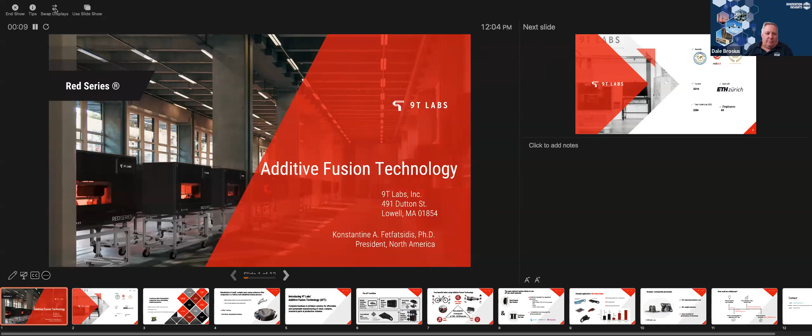And let me get my presentation here going. Everybody see the screen, or do I need to swap display? Yeah, you need to do the swap again. Swap here. Is that good? Yes, perfect. All right, perfect. All right, thank you, everybody.

Good morning, good afternoon, depending on where you are all around the world. As Dale said, my name is Konstantine Fetfatsidis. Very, very nicely done there, Dale. I know it's not an easy name. So, 9T Labs, a company that actually spun out of ETH Zurich now 5 years ago. And just last year, the first year of some revenue generation, we decided that this year we're going to expand into the North American market. I came on board in early October, and we've set up our operations out of Lowell, Massachusetts right now. And our fundamental product, or service, combination—I'll explain a little bit more about that—is called Additive Fusion Technology.

So I'll go through some of the history here on 9T Labs. Like I said, spin out of ETH Zurich. We did a Series A last year, so in total about 22 million in funding. We now have 65 employees, majority of those, of course, out in Zurich. So we're growing and looking to expand, in particular, our North American operations.

Continuous fiber thermoplastic composites, many of us know, have outstanding material properties—nothing new, been around for decades. They enable things like higher production volumes, lower cycle times. The part costs can be significantly lower, even though a lot of people tend to focus on raw material costs. It's important to look at the full process and consider part costs. And then, of course, as we get more and more concerned about sustainability and recyclability and greener processes and products, thermoplastics really can address a lot of that as well.

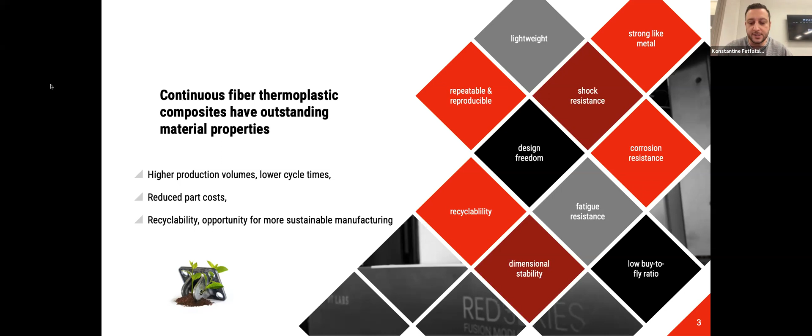However, manufacturing these small, complex structural parts using continuous fiber composites has really been tedious, suboptimal, and a manual process, which drives part costs up. If you consider dollars per pound on a part basis, costs tend to be much higher and more complex when you factor in all the manual labor for layup, the tooling, and all the post-processing required. Many times the manufacturers will just resort to metallic parts instead—aluminum, steel, titanium—in a lot of these structural applications.

Metal remains easier to process, even to simulate in FEA, and as I mentioned, expense has been the big problem. So what's lacking is a full stack, complete solution that takes hardware and software and provides an automated way to make these smaller, complex parts, like the geometry you're seeing on the right, in a cost competitive way—something that can truly replace metals. We know we can replace metals from a lightweighting standpoint and cut a lot of waste, but can it be done so cost competitively? That's always been the challenge.

We think at 9T Labs that we can address this with our additive fusion technology. We call it AFT, not to be confused with AFP, of course. It's really a complete hardware-software solution for affordable and sustainable manufacturing of small, complex structural parts at production volumes. A lot of people, when 9T Labs started off, think of it as starting really in a 3D printing type of technology.

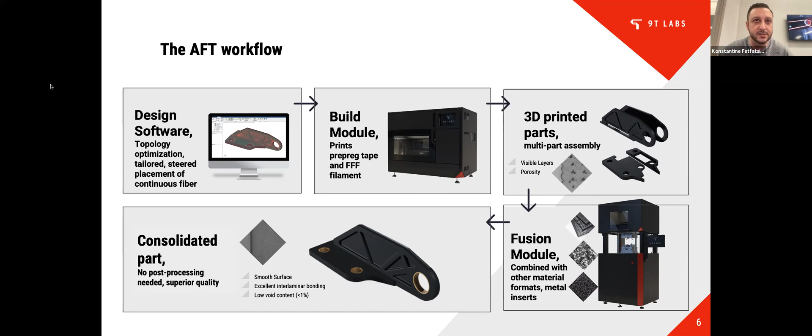The two together with other low-cost materials are really what this whole AFT process is. And we sort of bring it all together with our software to have this full stack solution. So the value prop, when you use this, like I said earlier, the smaller complex parts, under 100,000 parts a year, structurally loaded, there's got to be some kind of load carrying capability here.

Otherwise, probably doesn't make much sense to use continuous fiber. So we've seen a lot of really good use cases working with a lot of OEMs and suppliers in mobility, a lot of mobility applications, whether it's ground mobility or air mobility. So bicycles are really hot, and you see some examples of parts on areas of the bikes that we've been working on, cars and four-wheelers, and of course lower volume types of cars, a lot of electric stuff, scooters, e-bikes, things like that. And then aircraft interiors, right?

I mean, we know that the life cycle of an aircraft can be decades, right? But the interiors tend to be replenished every 4 to 8 years, right? And so there's a lot of opportunity there for companies always looking to build greener aircraft cabins and lightweight further and get a lot more bang for their buck on the interior side. And so thermoplastics are gaining more and more traction there, and we're working actively with different partners and OEMs and suppliers looking at some of these applications.

And altogether, the value prop here is not just weight reduction you could achieve through that black aluminum approach, just by taking the existing design and moving it to composite, you're going to get 30% probably automatically just by doing that. We really target at minimum 50% weight reduction by leveraging the design optimization we get from our software.

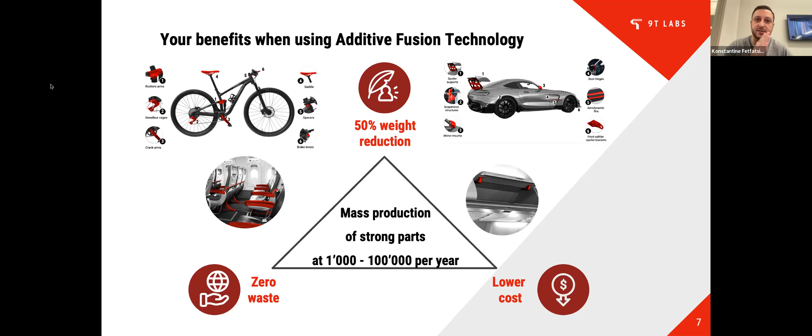And then lower cost, and I think it's not enough to just be lighter weight and reduce waste if there's also going to have to be a premium paid here. So everything we do, we work with the customer to make sure that there's a favorable business case at the end of the day as well.

I should mention that the AFT process is actually an open materials platform. So while we do have strategic partners like Solvay, Arkema, Evonik, you've seen at the bottom here, some even investors, we don't limit ourselves to those materials. We offer these materials either in tape format or in filament format. But if a customer came to us and said we really want to use this PPS that we've qualified recently, or a bio-based PA material, we'll work with them to make that happen. And it's certainly compatible with our system.

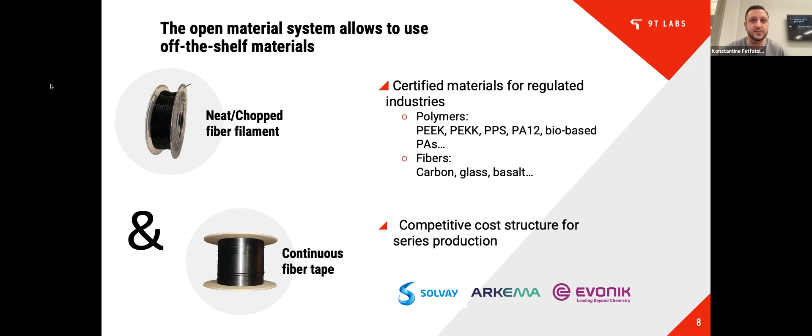We've done a similar program with Purdue that was highlighted at CAMX, our first show in the US back in October. So we'll be doing more of that.

We'll be at SAMPE in Seattle in April, and then the following week at JEC as well. So hopefully you guys will see more and more of us and our technology.

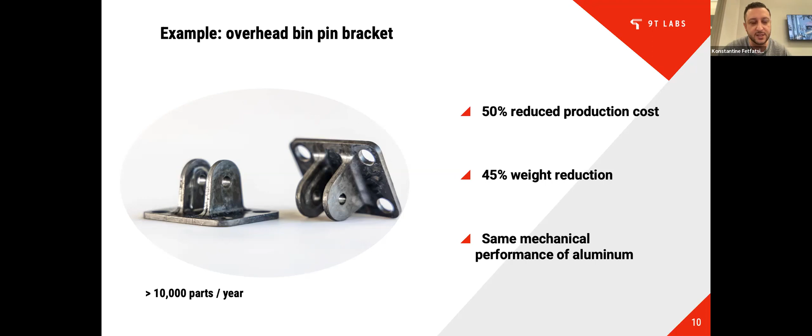So our business model, you see our equipment, you see our process, but we don't necessarily try to just sell the machines to companies. At the same time, we're also not trying to become a parts supplier here. What we want to do is enable suppliers and OEMs to use AFT and make it a standardized process in 5 years or so from now.

And so the way we want to do that is we work with the customer up front to scope things out, and then ideally we get this, on average, a 6 month proof of concept project, feasibility discovery phase, whatever you want to call it, on the order of 50 to 100K.

Think of it almost like a phase 1 SBIR, in a way. And we find a candidate application that we think is really high value-add and typically has a path to production, not just pure R&D.

So we like to work with them, kind of hold their hand, and use our services—our engineering, manufacturing services, and our machines—to make some of those prototypes and even some low rate initial production, like the first 100 and the first 1,000. In fact, we recently had a case with Oris, a watchmaker out in Switzerland, where we did just that.

And then as production ramps up, at that point we'll transition the machines to our customers and allow them to take it into production from there on out. So that's sort of the business model.

And so we're looking for more and more partners to work with us and collaborate on good candidates—aluminum, steel, titanium parts that you can really try to lightweight, without sacrificing performance or cost. That's what we're looking for, those types of applications.

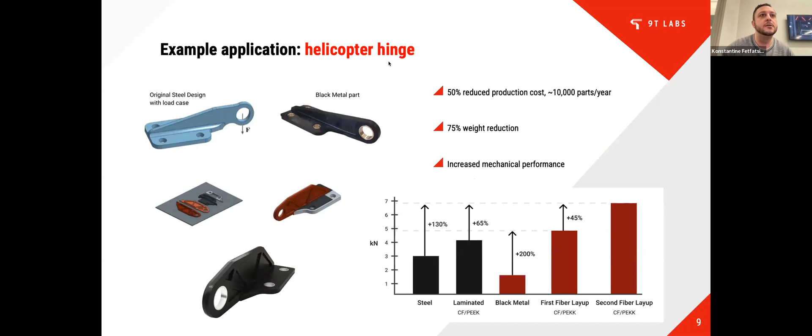So we can absolutely do PEI. The footprint of the machine, the build module itself is on the order of 3 feet probably wide and maybe a couple of feet deep. So it doesn't really take up a lot of space, we put it on a cart. In fact, I might even have an image of this. Well, that doesn't really tell you much on the scale there.

Power requirements: right now, it's all rated to EU power. We are definitely working on getting that to be automatic and universal, so we don't need transformers and stuff like that. But at the moment, it's all sort of rated to European specs. So is it like 240, 480? Yeah, 240. I think the Fusion module might be 480. Oh yeah, that's right.

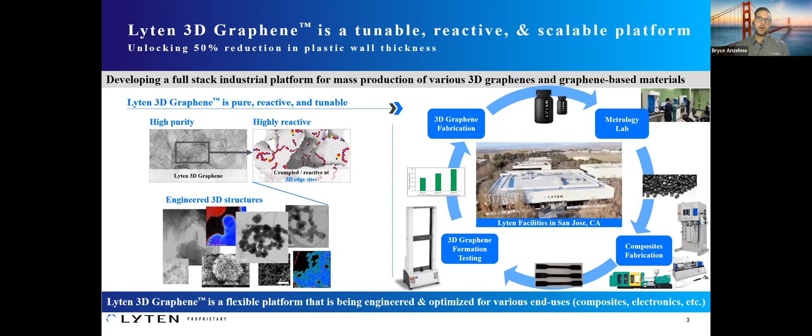Once we're satisfied with the material spec, we put that into the application. You see here composites relevant to this audience. We have a small injection molder as well as a twin screw compounder, and with some of the IACMI partners, this consortium has been great for us to scale up to what we'd call pilot scale. We rely on the industrial scale from our commercial partners at the moment. So we can do that under one roof, and then we do the testing as well, with all the mechanical instruments and environmental chamber for testing. If we get the performance we like, the customer receives it. If not, or there's an iteration cycle, that continues. It's really a flexible platform that's engineered, architected, and optimized for that end-use application.

Looking at it a different way, we don't just take the material and throw it over the fence. We really take the 3D graphene construct and tune that morphology, modifying and manipulating the 3D structure. We can also add chemistry or functionalization. Functionalization captures not only the surface chemistry, but the ability to have a coupling agent if that's needed for the end polymer system. Then that goes into the application - composite, sensor, and battery is largely what we're focused on at the moment.

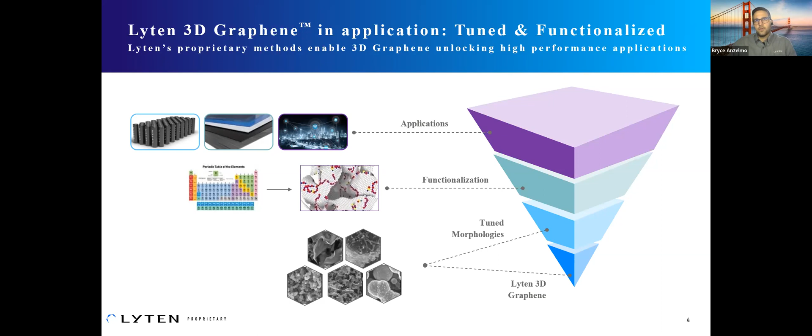So what do you get with the performance here? Lyten's LytR, is a trademark name we have for our current solution and formulation within rotationally molded applications. Rotomolding, for short, utilizes polyethylene, various forms of it. What we've found working with some of our partners is the ability to reduce the plastic or polymer by 50%, so you get similar performance but with 50% less plastic in the end system.

What we've been tasked with a lot, and what the industry needs, is a stiffer polymer system. So we've developed and engineered for a flex modulus improvement as the driver for stiffness, a criteria for stiffness as a screening mechanism. You'll see the flex modulus in the middle, 177 KSI based on the ASTM standard, which is about a 40 to 50% improvement in stiffness over the base polymer system. In application, rotomolded - for those unfamiliar, you have a melt polymer in an oven that's rotationally molded, and the product comes out. I'll show a couple pictures on the next slide with one of the partners we're working with to underscore that point.

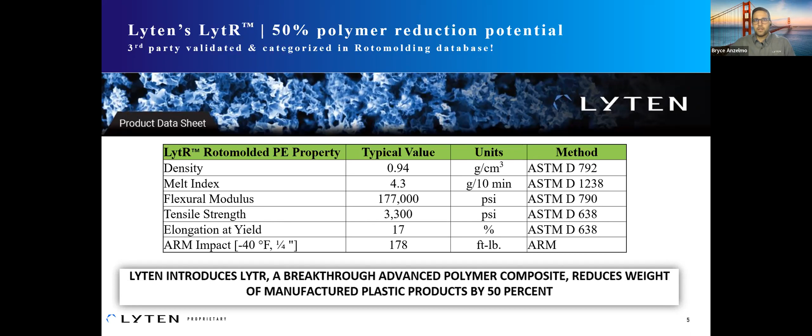So here's one of our case studies: rotomolding with Lyten's material. Not only do you get the stiffness improvement, there's always questions about how does it mold, how does it fabricate, what do I need to do differently?

Of course, owing to the stiffness, the parts are stronger, and they hold their form better. If you dig into what that means, the materials, when they're molded, are actually able to come out of the mold even better than the base material being used. Sometimes you get challenges trying to get a part out, and you maybe need a crowbar to pull it out of the mold. But in fact, these came out of the mold beautifully.

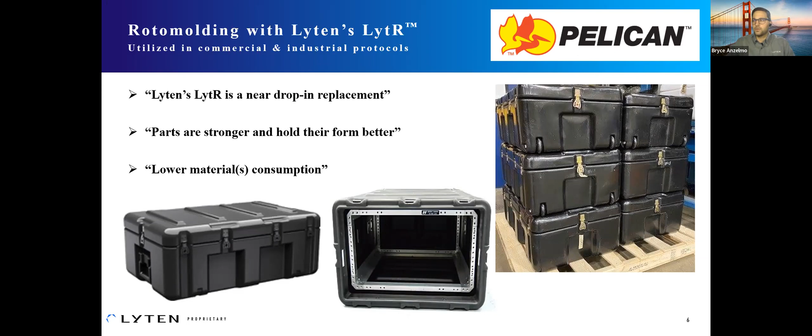And then, of course, one of the big opportunities is lower material consumption. If you're using 50% less plastic, not only do you use less per part, but if it loads quicker, you also get productivity gains across the board: less material used, but also more parts made per hour. This is on an industrial, commercial scale. We've made a stack of cases, and in fact quite a bit more have been made to really screen this.

So key takeaways, this is more or less my last slide. I did want to save some time for questions if there are any. In advanced materials and application engineering, at Lyten we take our materials and love to design, architect, and engineer them into end applications, demonstrating a 50% weight reduction potential on the polymer systems we're using today. There are established 3D graphene solutions in applications. It's not just a material sitting on the shelf that we throw over the fence, but specifically designed for various different applications on the end product.

I talked here today a lot about rotomold, just to give one small example in this 20-minute window to this audience, but we really do have a lot of other composite developments underway that I'd be happy to follow up on with anybody who has specific questions about what we're doing in other product areas. In the composite realm, we're probably at about another half dozen to a dozen different application areas that we're engineering and designing for today.

So motivation for forming the working group. Well, obviously, infrastructure is a very hot topic. The Infrastructure Investment and Jobs Act, or the IIJA, or the infrastructure bill, was passed in November of 2021.

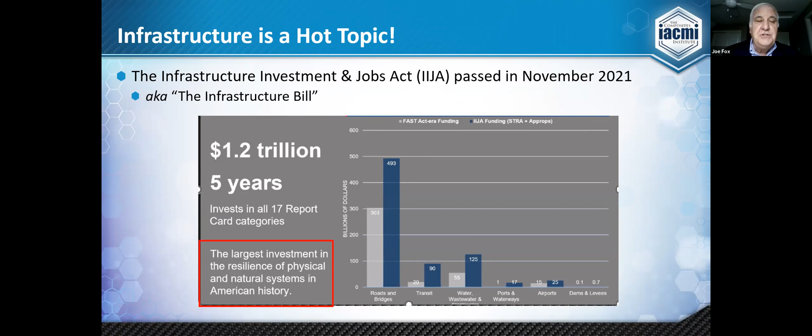As you can see from this graph, it talks about $1.2 trillion in investment over the next 5 years, and it invests in all 17 categories of the American Society of Civil Engineers report card. As such, it represents the largest investment of its kind in our nation's infrastructure in our nation's history. So there's a great opportunity, and there's also a very good fit with composites. In fact, there's an extremely good fit between FRP composites and our nation's infrastructure needs, both today and in the future. So you've got a good opportunity, you've got a very good fit. That's a good place to be.

So in terms of collecting and disseminating information, we really try to answer these 2 questions: What's in the infrastructure bill, and what funding opportunities exist for infrastructure related R&D? Where is the money going to be spent, and where are opportunities for IACMI and its members?

So this is the kind of information that we show to our members. We show about the different areas where money is going to be spent. We show how it's going to be spent. We show where it's going to be spent.

And really, if you look at the infrastructure bill, there are really 2 big buckets of money. There are hundreds of billions of dollars for construction projects to repair existing infrastructure like bridges, pipes, and ports. And then there's also money for new infrastructure like EV charging stations, again hundreds of billions of dollars. And then there are also tens of billions of dollars for funding for R&D related to infrastructure. Billions, not millions. So we are interested in both of these buckets.

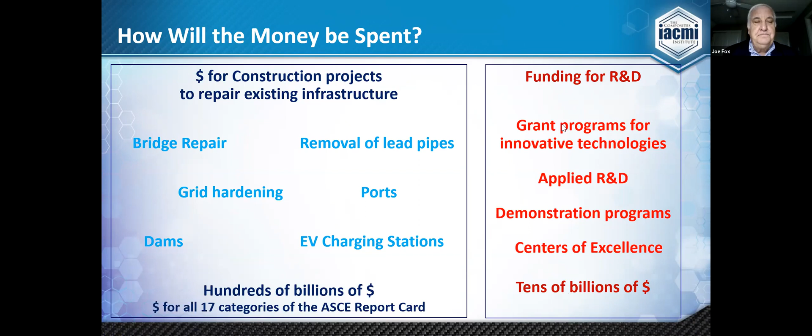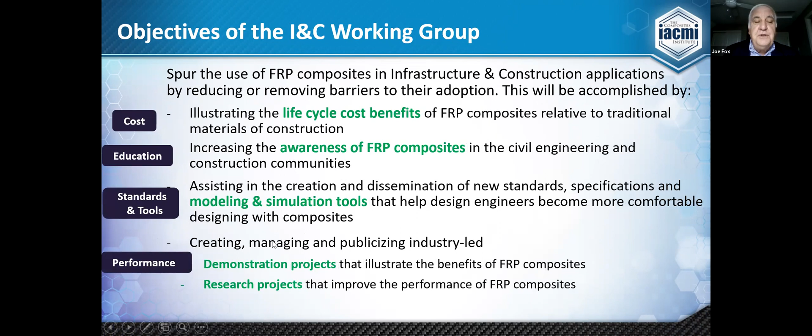And here are the objectives for the I&C working group. I'm not going to read this slide to you, but the objectives really tie very closely to the barriers that I talked about on the previous slide: life cycle cost, awareness, modeling and simulation tools, and R&D projects. And I really want to spend a few minutes talking more about creating, managing, and publicizing industry-led demonstration projects and research projects.

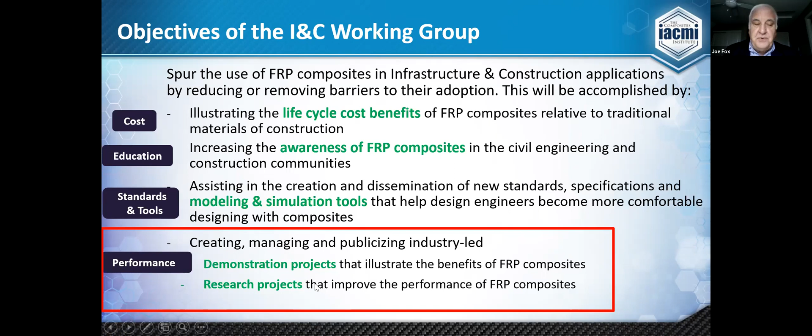So the working group has really adopted what I call a parallel path strategy for R&D projects, in that simultaneously we are trying to develop a list of potential projects and simultaneously trying to identify and secure funding for those projects. The rationale is to have projects that are already well-defined once funding becomes available.

And so let's talk a little bit about identifying and securing funding, because the working group has formed a funding subcommittee to identify sources of funding. And they have really looked for funding from two federal entities: the Department of Transportation, looking for funding for infrastructure-focused projects, and the Department of Energy for construction-focused projects.

And that strategy, I'll explain it a little bit more on this slide. If you look at the infrastructure-related activities of the working group, they really line up very well with the Department of Transportation, things like bridges and ports and inland waterways. And you're looking for matches in terms of resiliency and life cycle cost analysis and ease of installation. And then on the construction side, you have the Department of Energy really looking at buildings and homes, and they're interested in decarbonization and industrialized construction. And all of these areas match up very well with IACMI's capabilities and interests.

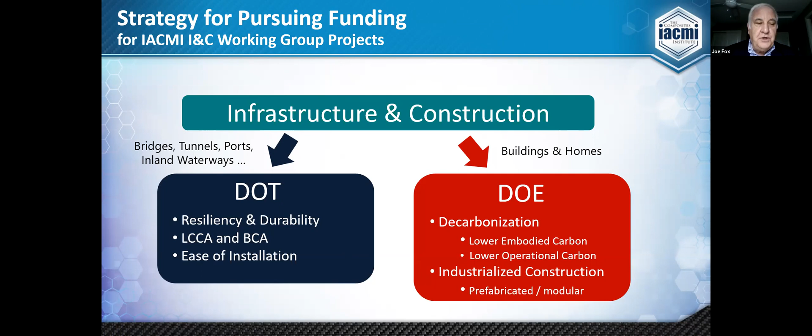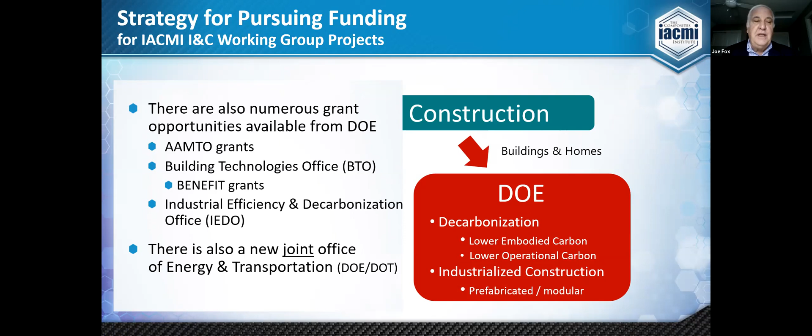So I've talked about funding R&D projects. Let's talk about creating R&D projects. The working group has a process for pitching R&D projects to the subcommittee or to the entire working group, and then the working group votes. We have a process where we listen and then we vote.

I'll start with what we call the Trimer project, which involves development of fire-resistant resins for infrastructure and construction applications. The project team consists of Orenco and Trimer Technologies. Trimer Technologies is the resin supplier, Orenco is the composite fabricator. The scope of the project involves preparation of samples and then conducting a series of fire-resistant tests with one of Trimer's resins.

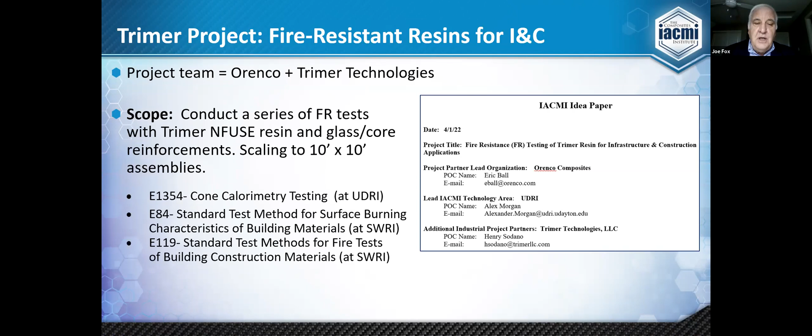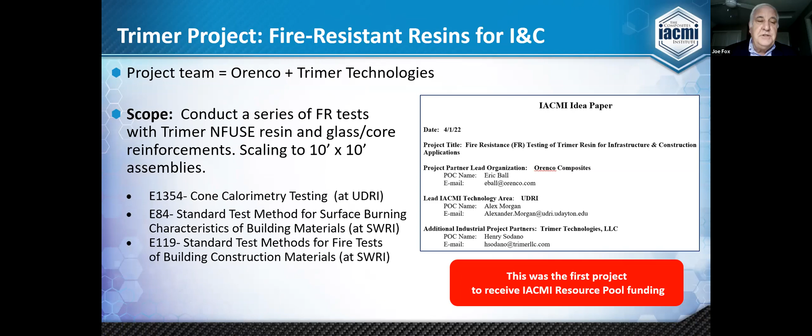Samples and assemblies are fabricated by Orenco. Here are the tests being conducted at either the University of Dayton Research Institute, UDRI, or Southwest Research Institute, SWRI. I'll point out that this was the first project to receive IACMI Resource Pool funding last year. The Resource Pool funding is a slice of the membership fees devoted to supporting research projects. Just a little bit about what Orenco is interested in.

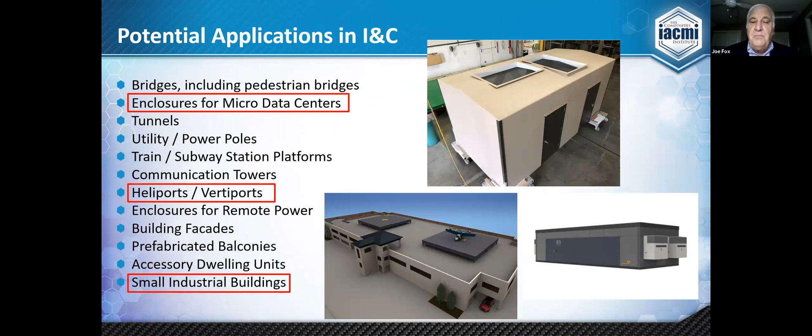There's a lot of applications where fire resistance is important. They're highlighting data centers, heliports and vertiports, and small industrial buildings. Again, a bit about the mechanics of the project: Trimer provides the infusion resin and process know-how, Orenco fabricates the samples for testing. The best way to describe them is web-stiffened, cored panels. Then the fire testing is conducted at UDRI and SWRI.

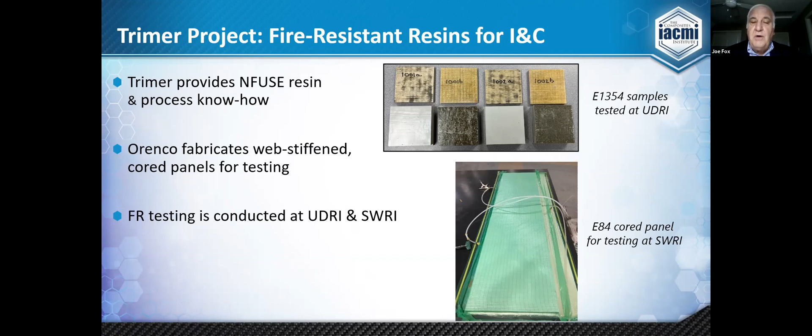Here are pictures of the cone calorimetry samples already tested at UDRI, and here is a sample of an E84 cored panel ready for testing at SWRI. That's really the next step for that project.

Let's move to the second project: recycling of wind turbine blades into infrastructure and construction applications. This is really important to IACMI members like TPI, which are getting ready to decommission thousands of wind turbine blades and want to find something to do with them other than put them into a landfill. The working group has identified recycling technology from two companies: RiversEdge Composites, a boat fabricator in Florida, and GreenTex, a startup company in South Carolina.

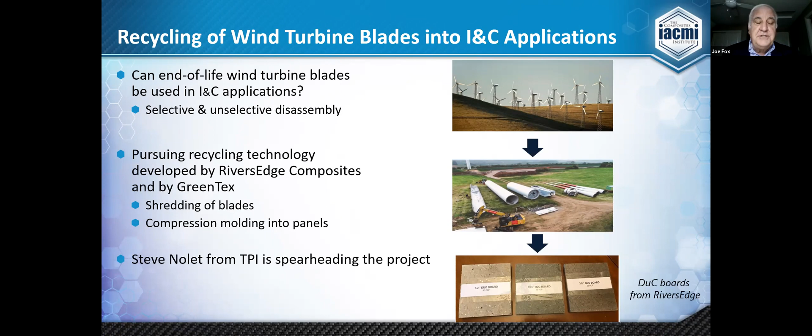So what has Steve done to this point? They've taken shredded TPI blades and successfully prepared 2-foot by 2-foot lab samples. They've identified a cost-effective phenolic binder for the process, and created panels like the one shown here, which could be replacements for things like oriented strand board and plywood.

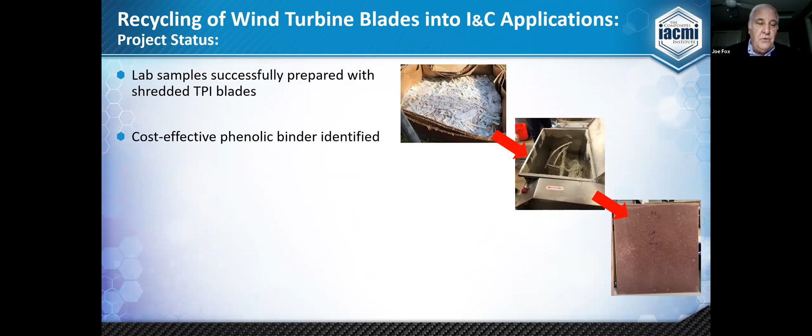I mentioned they've made lab samples. The next step for this project is to do compression molding of large 4-foot by 8-foot samples with this big compression press at TPI.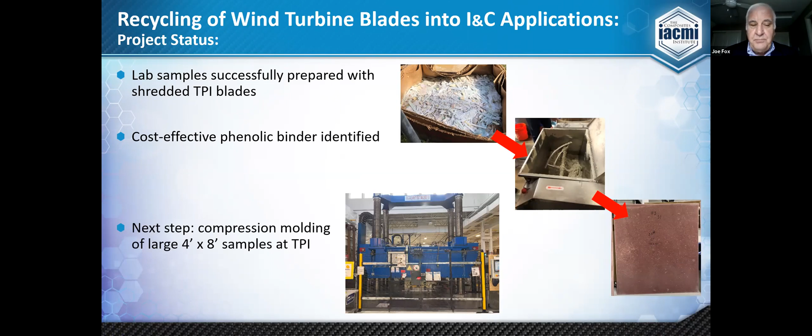The third project I want to talk about is predicting the lifetimes of composites in infrastructure and construction applications. This project is still in the definition stage. It started as a project to enable state DOTs to better conduct benefit cost analysis and life cycle cost analysis with composites. Here are some of the documents relevant to the project.

This is how the project started, this was the initial vision, and then it morphed. The reason it morphed is because of a very important meeting we had in November with what we call a DOT sounding board. We assembled a team of 7 DOT representatives from 5 different states all around the United States to obtain the voice of the customer.

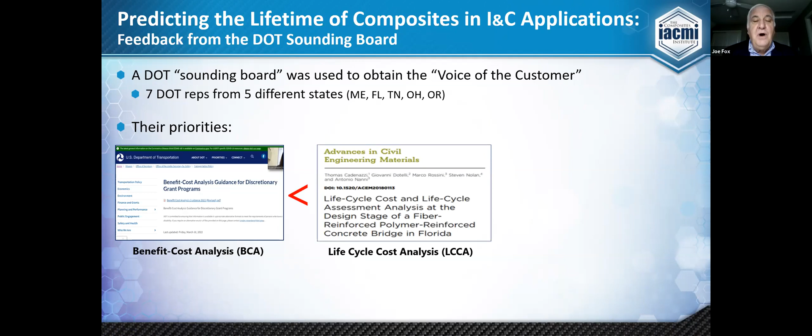Basically, we gave them our vision for the project, and then we listened. We listened to their priorities, and they told us: yes, we're interested in benefit cost analysis, but we're more interested in life cycle cost analysis. But what we really need, a critical need, is lifetime durability data. We need the ability to predict the lifetimes.

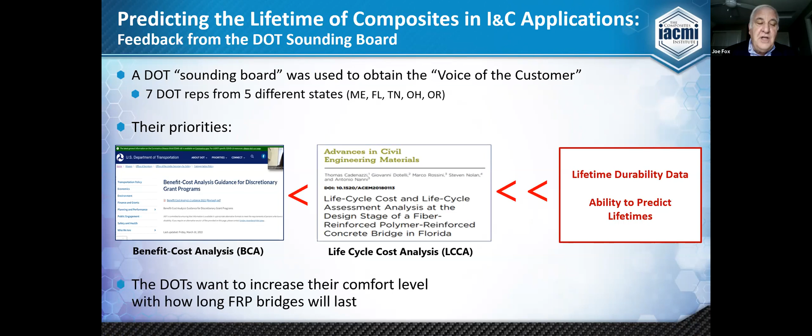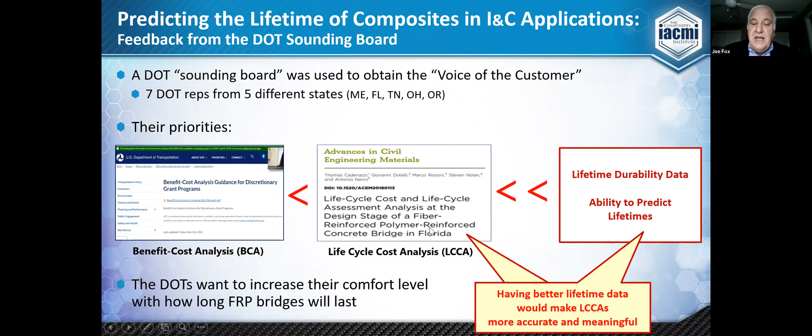They want to increase their comfort level with how long FRP bridges will last. If you provide them with this lifetime durability data, it will give them data that would make these LCCAs more accurate and more meaningful. The good news is that this represents an excellent opportunity for IACMI to respond to this high priority need, because we can do things like accelerated testing of composites and simulation and modeling to extrapolate and predict lifetimes.

So the project team is in the midst of refocusing the project. And there's more good news: the DOTs want to stay involved. All 5 states want quarterly updates. The next one will be planned for March.

Last project I want to talk about is decarbonization with FRP composites. Like infrastructure, decarbonization is another hot topic. Seems everyone wants to lower embodied carbon and carbon dioxide emissions. Here's the list of priorities for the Department of Energy's Office of Energy Efficiency and Renewable Energy. You see here, reducing the carbon footprint of buildings.

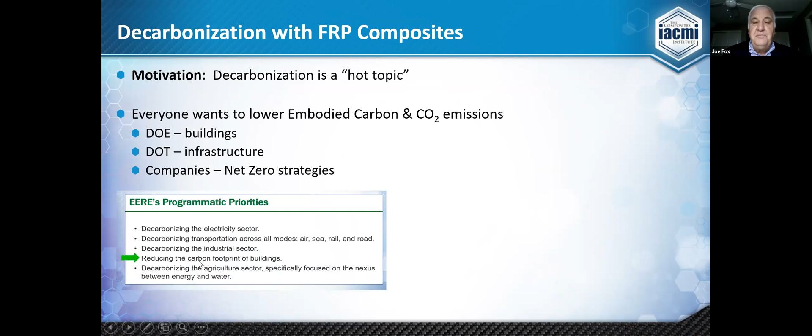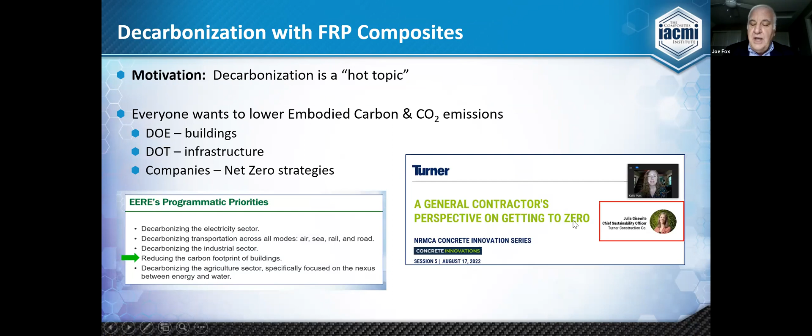This is the title slide of a presentation given by Turner Construction's Chief Sustainability Officer. They were talking about their strategy for net zero and how they were looking for building materials with low embodied carbon. So again, here's another project that's still fairly new. It's in the formative stage, but what do we want to do?

We want to create more stories like the LCA for the Halls River Bridge, because it has shown that carbon dioxide emissions are 26% lower with FRP than with steel. We want to generate more stories like that.

We also want to get data for FRP composites into embodied carbon databases like this one from the Carbon Leadership Forum. It contains very useful embodied carbon data for building materials like concrete, steel, and aluminum, but there is no FRP data in that database. We want to change that.

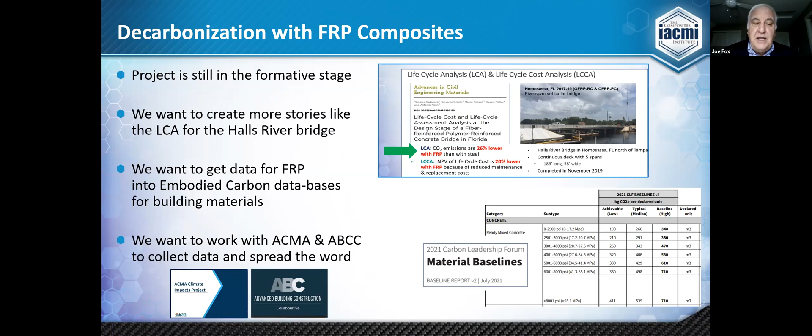And we want to work with ACMA, which has initiated their Climate Impacts Project, and with an organization called the Advanced Building Construction Collaborative, to collect the data and then spread the word throughout the I&C community.

The last thing I want to talk about is increasing awareness of FRP composites in the I&C community. Last April, 4 members of the working group collaborated with ASCE to put on a 90-minute webinar entitled An Introduction to Designing with Fiber-Reinforced Polymer Composites, designed for civil and environmental engineers.

We really assembled an all-star list of professors. Dayakar Penumadu from the University of Tennessee started off with basic mechanics and properties of composites. He was followed by Francisco de Caso from the University of Miami, who talked about designing with rebar. And then Bill Davids from University of Maine finished up with talking about FRP girders. They all did an outstanding job.

We have a very good story to tell, but we really need to take every opportunity we can to educate the civil and environmental engineering community about FRP composites. So that really summarizes or completes my overview. If you're interested in joining the working group, you can send me an email at the address shown there. And that concludes my presentation, and I'll be happy to answer any questions.

All right, thanks, Joe. Yeah, we're getting close to the end of the hour, and there's nothing specific other than, yeah, somebody just wants to make sure they can get contacts for each speaker, and copies of the presentation to go over with their team. I'll work with Kim on that. The person asked that question, if you'll email Kim Hoodin, that's K-H-O-O-D-I-N